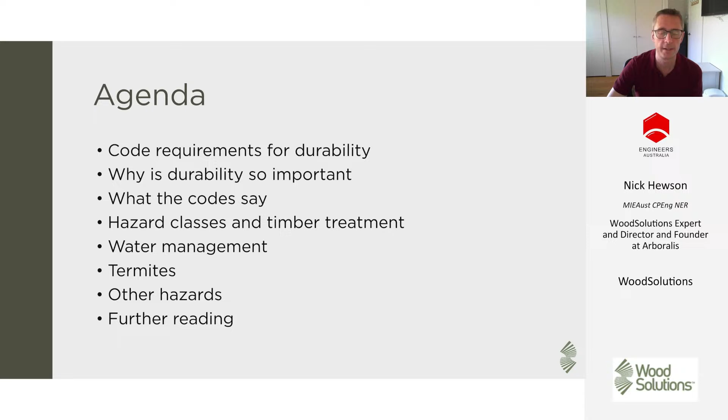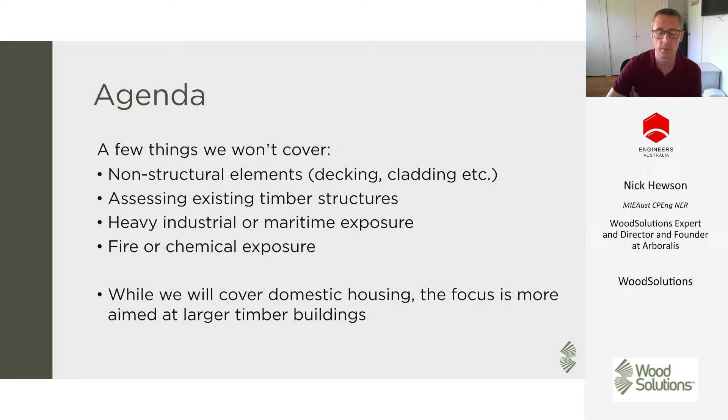As I said, I'm here on behalf of Wood Solutions. So they're a not-for-profit company that's resourced by Forest and Wood Products Australia. Their remit is to promote forest and wood products to the building sector. They offer a whole range of things, from webinars to technical design guides on their website that you can go and download for free, written by industry experts, and we'll be referring to a few of those later on. They also have a project portal, which is a reference of hundreds of buildings from all around the world that you can search for by project type and other variables, which will give you some inspiration.

And why are we here? Why are we talking about timber? Timber is a sustainable, renewable resource. It stores carbon for the life of the building, and has been shown to improve wellness and enhance moods and things like that. So it's a wonderful material, one that I'm incredibly passionate about myself, and I'm really pleased to be able to come talk to you today on the subject of timber.

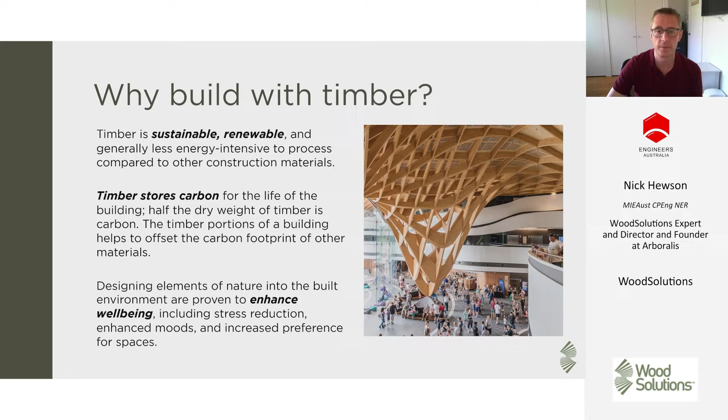So when we look at timber, durability has become a real pet topic of mine over the last few years. Wood can last an incredibly long time, as you see here, with examples of buildings which have stood for over 1,000 years, well looked after and maintained.

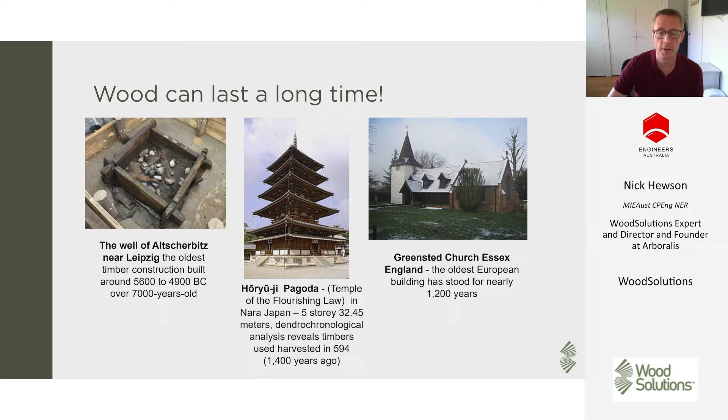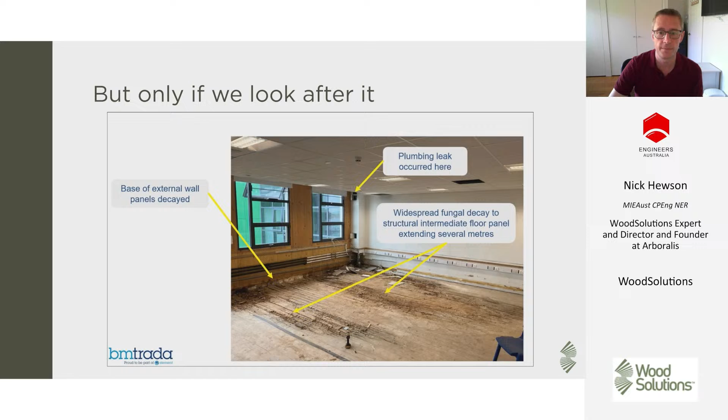But if we don't look after it and maintain it, then wood can deteriorate. What we want to talk about today is some of the mechanisms we can use to help prolong the life of our timber buildings and protect this wonderful material.

So starting at code requirements, when you start to look into the NCC, it's pretty vague on the topic of durability. It doesn't have any specific clauses relating to it, and puts the onus back on individual material standards. So you're looking in the NCC Volume 1, Clause B1D4, which refers to timber construction and refers back to the design standards. There's a lot more information there around termite risk management, and we'll talk more about termites later on.

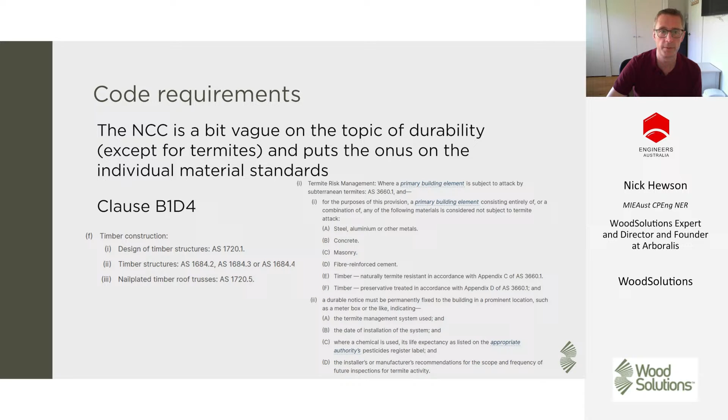But if I dive into AS 1720 Part 1, it has some clauses on durability at the start, but again they're somewhat vague. They focus more around treatment for termites and things, but just highlighting a few key clauses in there, talking about satisfying the strength, stability, and serviceability requirements for the design life of the structure, and we'll talk about design life and things a bit later on.

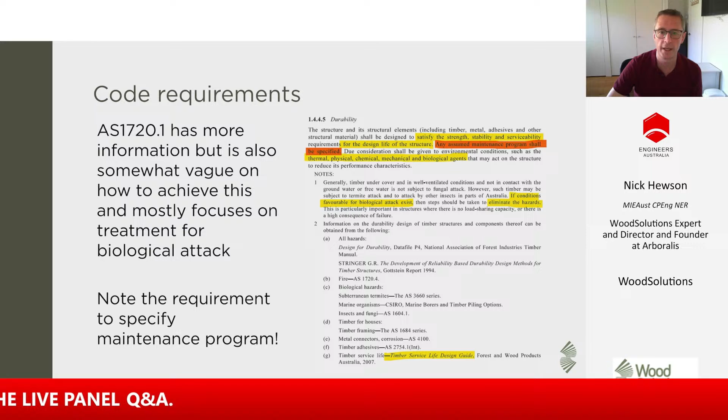And on the one there I've highlighted in red, any assumed maintenance program shall be specified, which is an interesting one, and we'll talk again a bit more about that later. I don't think many engineers will be specifying that in their projects, on their specs, and that's something I think we'll cover during the presentation.

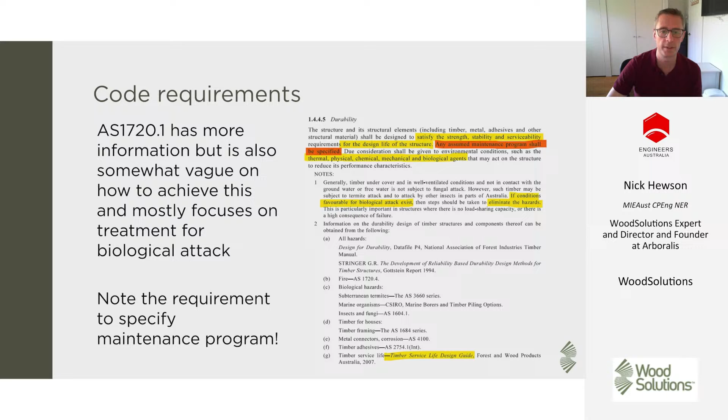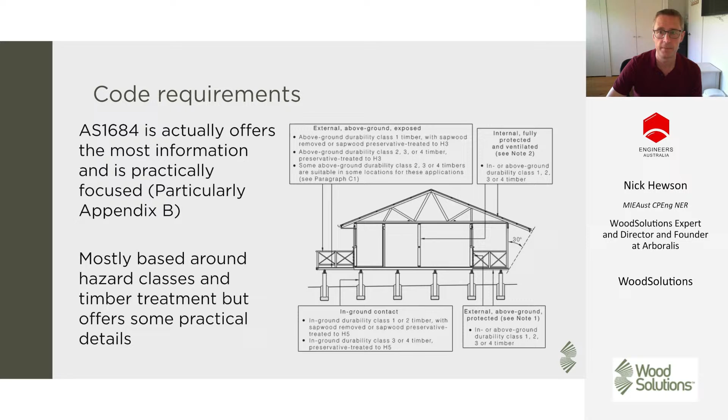So AS 1684 for domestic housing actually offers a lot more information. It's quite practically focused, has an Appendix B, which is all focused around durability, talks around different hazard classes of timber based on the level of exposure to weather or the ground, and gives a lot of classifications for that. It also provides some practical tips and details, and more of those sorts of things are actually contained in some guidance documents.

Technical design guides 5, 13, and 21 from Wood Solutions, again freely available on their website, offer a lot of tips and advice about particularly external timber. There's a lot of good detailing advice and information around timber species and things like that.

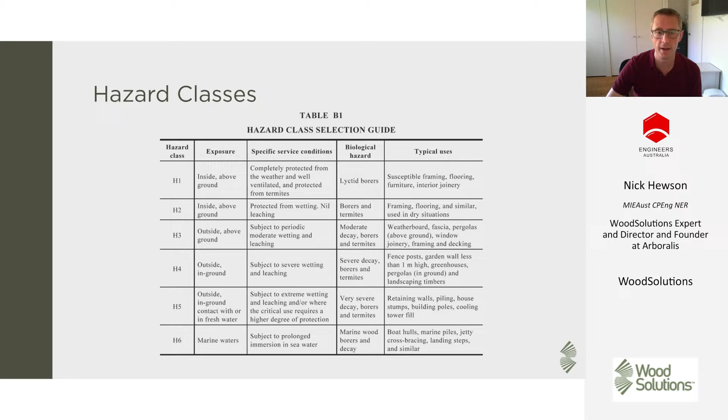So you get hazard classes, H1 to H6, getting progressively more aggressive environments. H1 and H2 are sort of internal protected, H2 being protected against termites and the like, with H3 being outside and above ground, subject to some weathering. These are the sort of main ones we will be focusing on. H4 and above are a lot more specific.

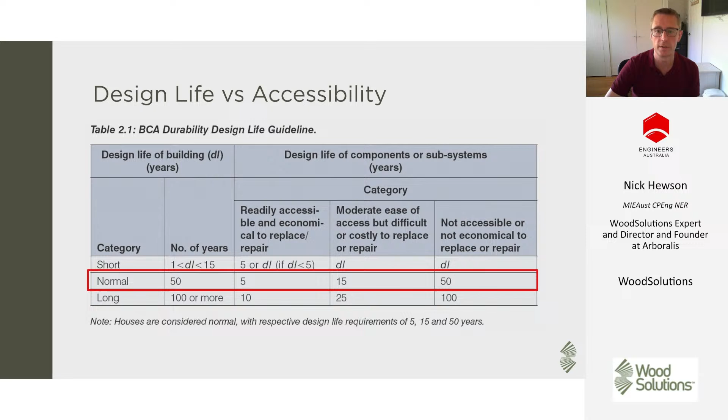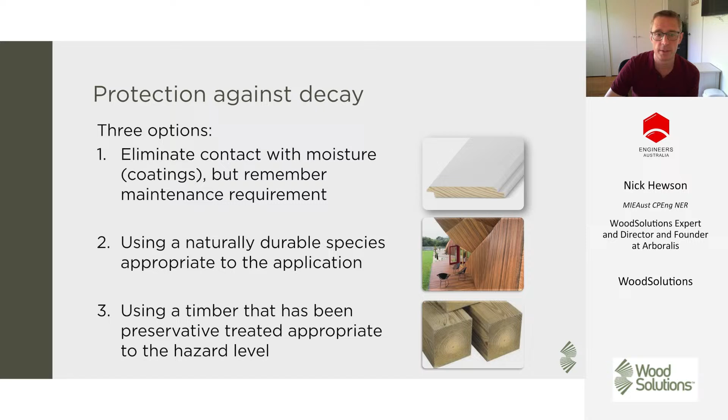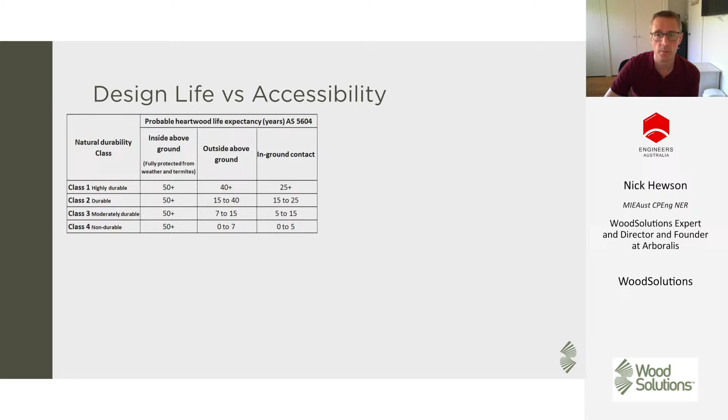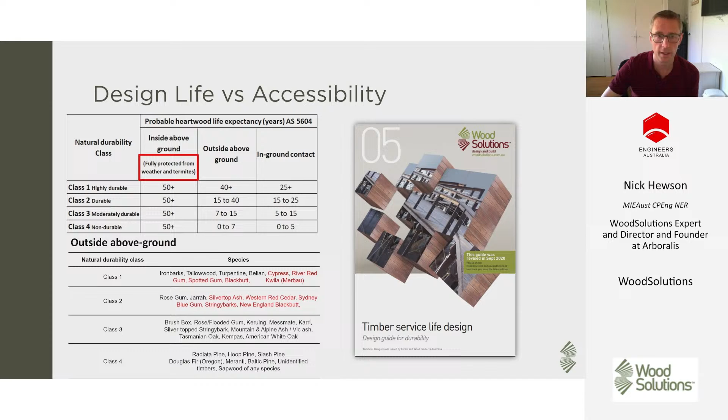So looking at different life expectancy, the Wood Solutions Design Guide will give further information on different species suitable for different classes, but just looking at outside, above ground, what are the different species we can use for those. So if it's outside, above ground, and you want it to be lasting 40 plus years, you're in those sort of class 1 species, which are your ironbarks, your spotted gums, your blackbutt, merbau sort of timbers. So obviously those ones are rarer and more expensive, so we need to have these sort of nuanced conversations with our clients around picking the appropriate timber for the job.

Timber treatment: preservatives can be either water or solvent based. There are a range of different treatments out there offered by different manufacturers. One thing I'll say about treatments is checking the compatibility with finishes and any ESD requirements.

Some of the higher treatments, at the H4, H5, H6 level, are fairly nasty chemicals, so we want to limit those to only where we absolutely have to use them. But a lot of the H1, H2 treatments are odorless, colorless, particularly when you get into the mass timber space.

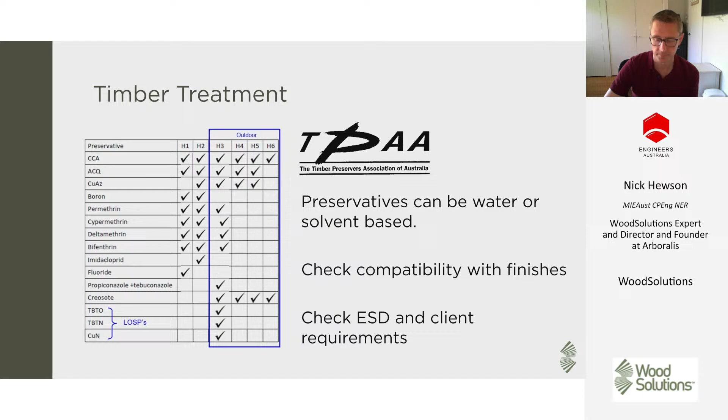But looking beyond the code, looking at durability as a larger picture, the expected design life we mentioned earlier assumes that the timber is fully protected from the weather and termites. So for it to last 50 years, the code says we can use timber as long as it's fully protected. But can we assume this?

I think increasingly we need to question this - whether we are fully protected, what other mechanisms we're putting in place in the building, and can we ensure that timber treatment or choosing a durable species is pretty essential.

If you're looking at external timber, there's not too many shortcuts there, but it doesn't necessarily solve the original issue if you're looking at internal timbers and things. So we could treat every bit of timber in a house, but that's adding cost, it's adding potential unnecessary chemicals into the environment.

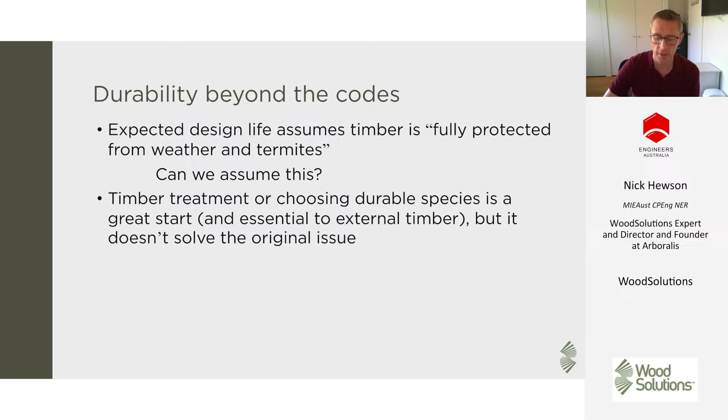So how do we deal with this more appropriately? I think that approach where we default to treated timber for everything is a very elemental approach. And I believe, particularly as timber buildings get more and more complex and the risk level increases, we should be taking a more holistic view of durability.

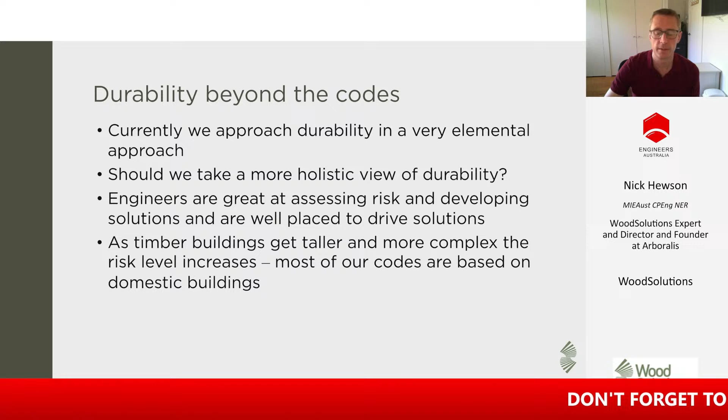As engineers, we're very well placed to assess risk, develop solutions, and we can be the ones to help drive these conversations with clients.

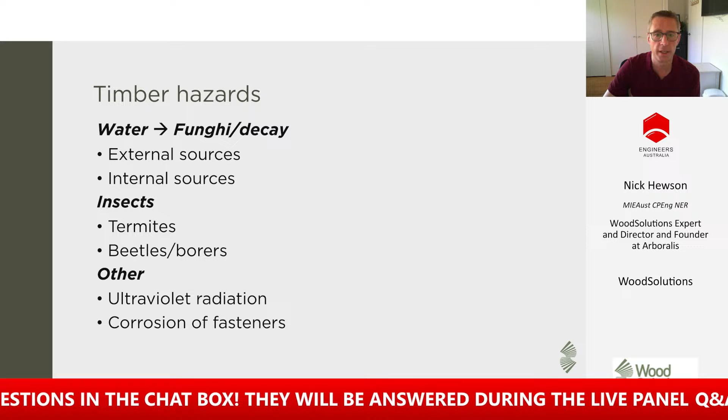So, going back to basics, looking at the timber hazards, the main ones I'm going to focus on today will be water, looking at both internal and external sources, looking at termites and insects, and then a couple of slides at the end on UV and corrosion.

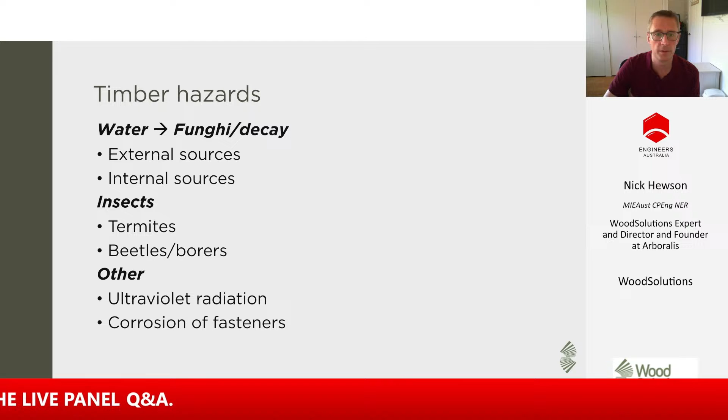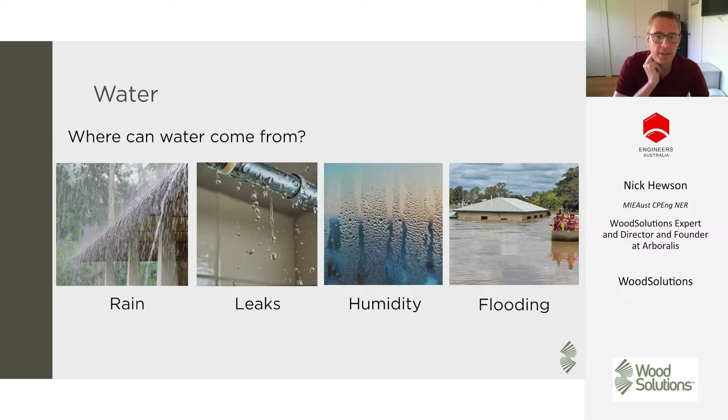So where does water come from in our buildings? Typically rain, typically things like leaks. To some extent, humidity and flooding can be issues as well. I'm just going to work through each of these.

But why is water important? Water itself isn't necessarily the problem, but the presence of water in the timber, in the structure, can lead to other issues.

Mold is probably one of the first ones that you're likely to see on site. Wet timber provides surfaces for mold to grow. It can happen pretty quickly, and it happens on most sites, to be honest. I've seen a lot of mass timber buildings go up, and there'll be some issues with mold somewhere. It's very difficult to avoid.

The mold spores are in the air as soon as you create that wet environment, and the timber provides the food. The mold spores can start to take hold and grow. It's not necessarily a structural concern, but it's something that needs to be treated before the building's closed in, to make sure there are no long-term health issues associated with it.

Where it is found in those long-term cases, it's often found more around humidity, condensation, inadequate insulation, leaks through windows and the like tend to be where you'll find mold once the building's in service.

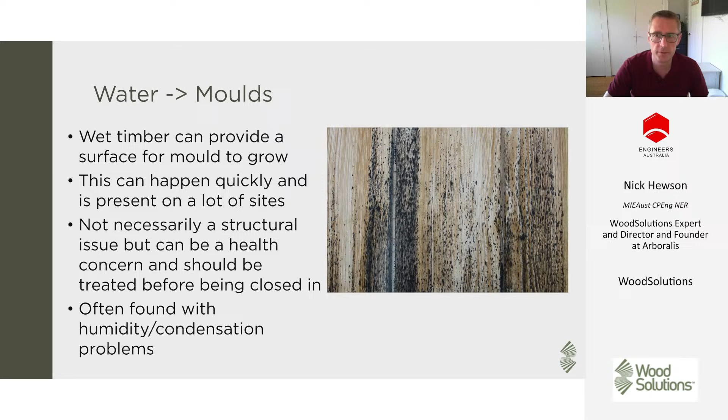More seriously, water can lead to fungal attack - that's decay, rots, white rot, brown rot, all sorts of different exotic fungi - and that can start to occur within a couple of months depending on the timber species, if it's remaining wet.

So for fungi to thrive, you need moisture content greater than 20%, you need oxygen, a nice warmish temperature, and the food. So removal of any of those four will prevent it. However, removing the moisture is probably the one that needs the most focus.

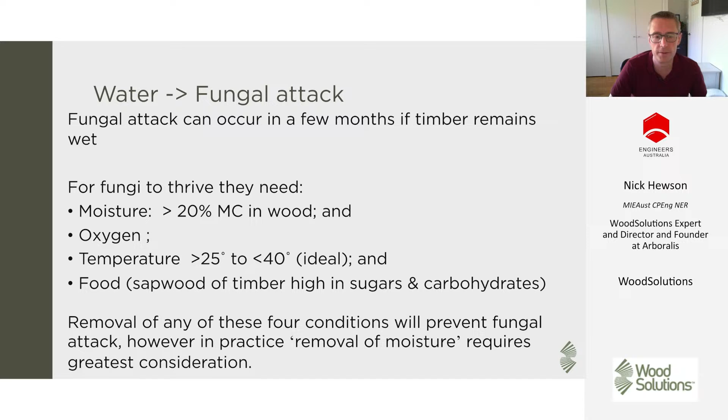Looking back at those moisture sources, water or flooding is probably not one we need to focus on too much. There are some requirements in the ABCB guide for construction of buildings in flood hazard areas, which talks about...

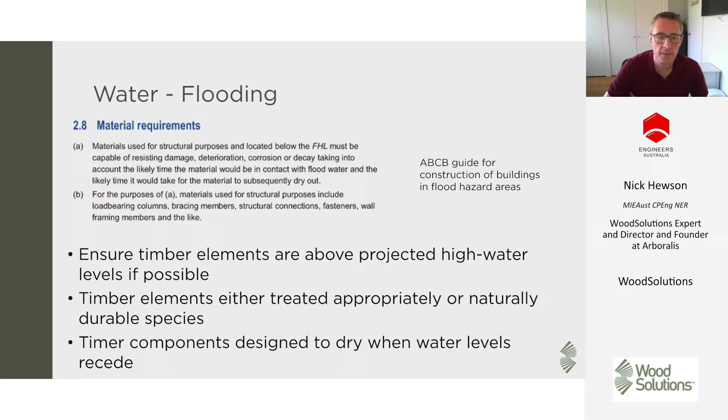ensuring that material in contact is allowed to dry out. My gut feel for water in flood-prone areas is to make sure all timber elements are projected above high water levels, timber species are durable or treated, and components are designed to dry when water levels recede. So there's certainly some areas where we need to bear that in mind, but this is probably more of a niche case.

Humidity is one that is starting to come in. There's a lot more focus on things like condensation in the ABCB these days. The short answer is avoiding impermeable layers like closed cell insulation or anything in the building envelope that will inhibit moisture. The moisture will tend to want to track in and out of the wall depending on the climatic conditions and the internal environments.

Mass timber and CLT in particular is one that needs a real strong focus because it is inherently so airtight. So you need to get that specification of membranes and insulation spot on to avoid the risk of inhibiting moisture movement and trapping moisture in the panel.

High humidity environments like swimming pools are very specialized, and anyone embarking on projects like that should work really closely with timber manufacturers, with coating and preservative treatment suppliers to help inform their design.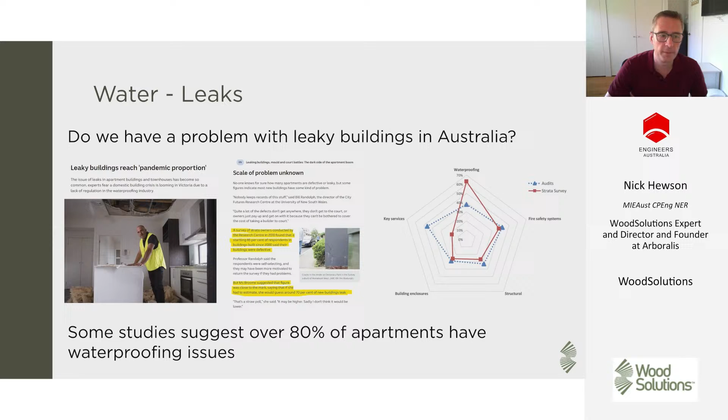So what do we need to do to address that through our designs, particularly as we start to push timber into larger structures, apartment buildings, mass timber, where the consequences and the cost of remediation get so much larger.

Basic principles, the 4Ds we call them, are a great starting point for reducing issues. Deflection - allowing the water to stay clear of any external envelope. Things like overhanging eaves are great for that.

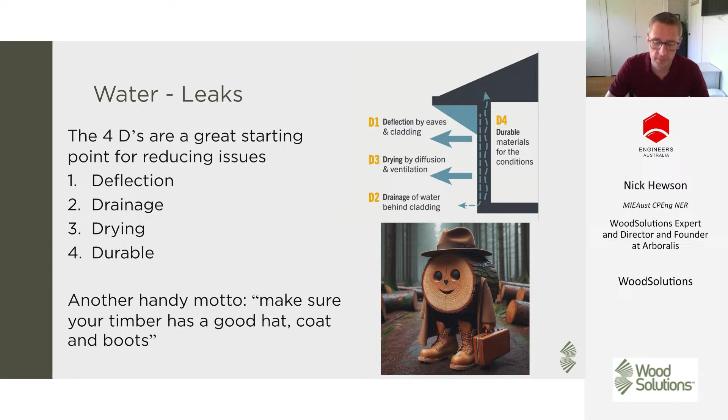Drainage - allowing any water that does get into the structure some ability to drain out, whether that's drained cavities behind cladding or drainage points within your structure. Drying - allowing those areas of timber susceptible to water and moisture to dry out, and choosing durable materials as we discussed earlier.

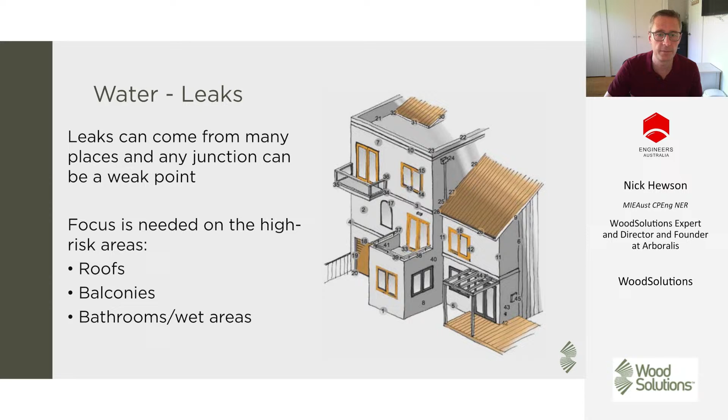So leaks can come from just about anywhere. Any kind of junction can be a weak point. But I just want to focus on a few of them quickly. Roofs - overhanging roofs have been successful for centuries.

I'm super wary of anything related to parapets and box gutters and the like. It just gives the possibility for water to collect somewhere on the roof, drains to get blocked. So there's a lot that needs to go right for those to work well.

One thing I often try to do in timber structures, again looking at things like CLT, is can we set the structure to fall? Is it possible to do that as part of the architecture, because it's providing us a backup. If you're putting in a dead flat CLT roof, that's going to have a deflection associated with it, so it will have low points, and water getting in will tend to sit there. Whereas if you can fall the structure, any water bypassing your roof can potentially drain out to somewhere in the facade and migrate its way out.

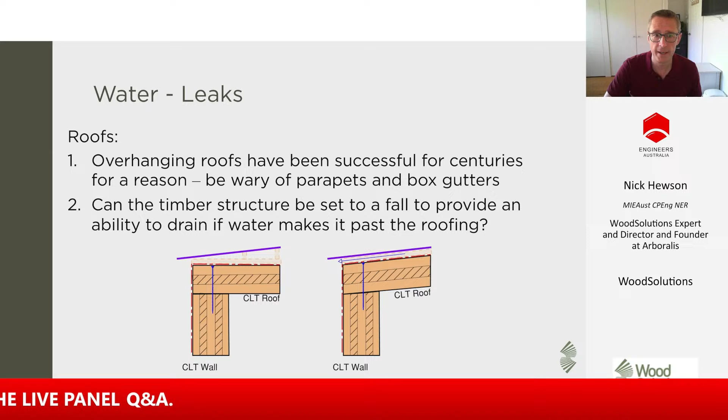What level of redundancy is there in the waterproofing system on the roof? Are we reliant on single membranes? When is that waterproofing system applied?

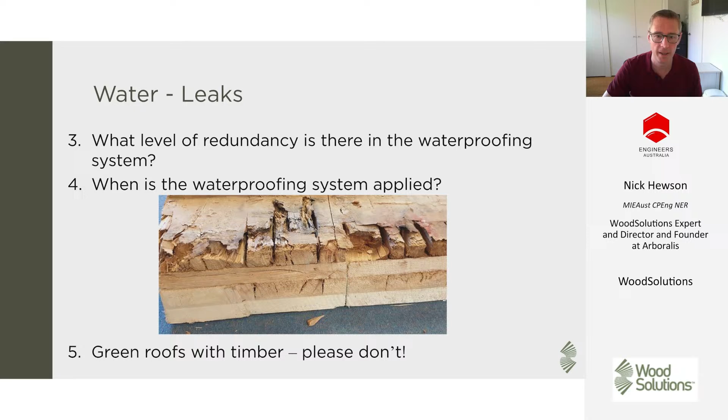Your site controls and making sure we do those things quickly is important. Green roofs with timber - please just don't do it. I think it presents so much risk. We need double, triple layers of protection, and if you want to do something like that, there's just a lot of water associated and a lot of risk.

Balconies - I'd question whether timber balconies are appropriate in the first place. Similar to roofs, can you set these to falls? And what's your backup plan if the membrane fails?

The picture at the bottom is a real project I've been involved in, where there was a CLT balcony with a single membrane on top, but that membrane failed, and water was able to get in, track under the membrane, and between the CLT and the fire-rated plasterboard underneath. The problem was it wasn't a lot of water getting in each time, but it was very difficult for that water to get out, so significant volumes of water were trapped in there for a significant amount of time.

One of the other aspects is how long does it take before that is visible? It can take several years potentially for water to make itself known. So if you are doing mass timber balconies, just be really, really careful - make sure you're going belt and braces with waterproofing.

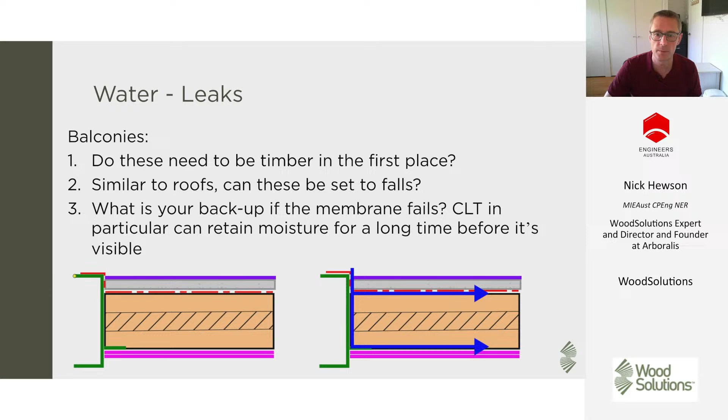How are those inspected or remediated? I've started to see a lot more pod and paver type solutions specified for balconies. I think it's a really good solution for timber - it gives us the capacity to lift up pavers and to inspect and remediate if there are problems.

Going back to that question around design life and remediation - if there's a problem, how easy is it to remove the damaged panel? Looking at that detail at the bottom, that's a sort of detail I used to do on projects where set-downs of balconies tend to overlap, and you screw through to both - it's a nice robust detail. But that balcony panel, if it ever needs replacing, is an absolute nightmare.

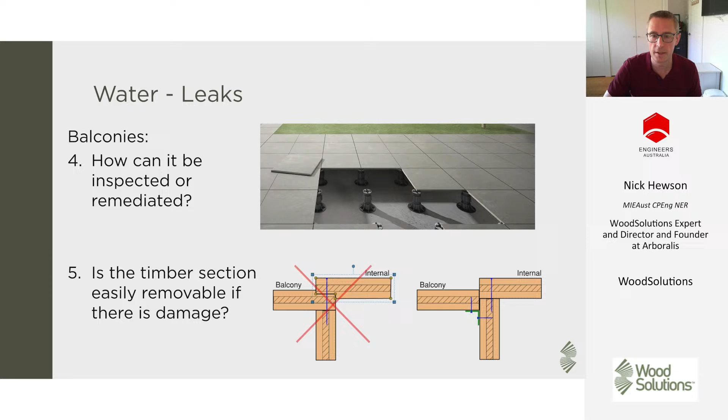So do we look at other systems where we take those higher risk areas, whether it's a balcony, a wet area or something, and give ourselves the possibility to remove those simply?

Wet areas - again, relying on single membranes in these is fraught with problems. What's the design life of that membrane? So if we go back to our initial question about design life and the assumption that the timber is going to be protected - what's the design life of our membrane? Is it 15 years? Is that going to be replaced after 15 years? What is our mechanism there?

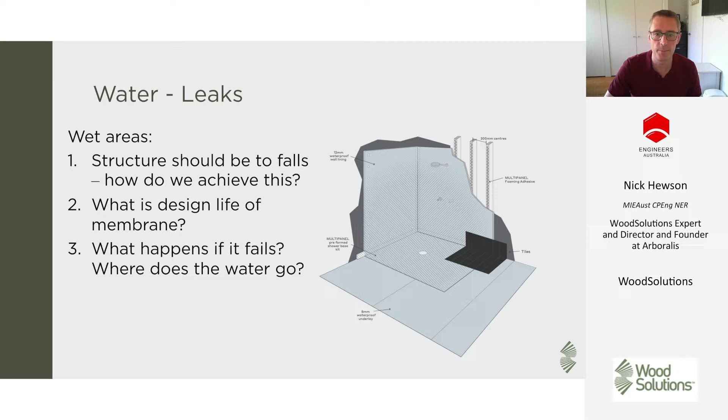I'm always asking myself when I'm designing these things, what happens if it fails? Where does the water go? These are the guiding principles whenever I'm thinking about leaks - putting a minimum of 2 levels of protection in any high risk areas. Now, whether that's a membrane and treatment to the timber, or 2 layers of membrane, or a waterproofing system and active monitoring.

Always got to ask yourself, how do you protect against that? Because I don't think there's any way we can guarantee that those membranes and that protection is going to last the design life of the building. Always got to ask yourself where the water goes if it leaks, and how long before a problem is known about.

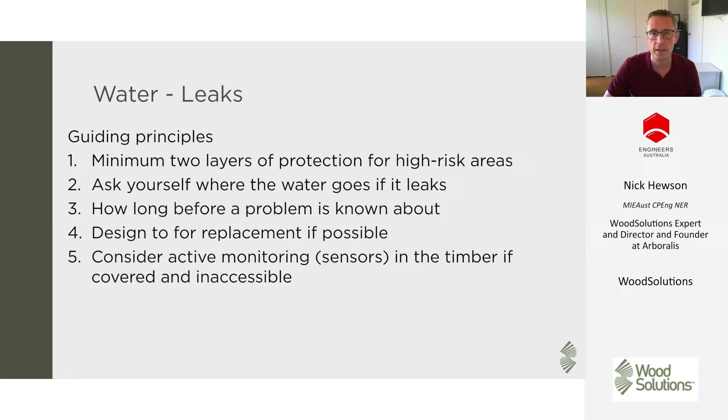Particularly in domestic or apartment buildings, we have large build-ups below the slabs for acoustics and fire. It can take a long time for water to migrate through those. In an office building that potentially has more exposed soffits, you're slightly more likely to get notification that there's a leak much faster. So having that kind of nuanced conversation is really important.

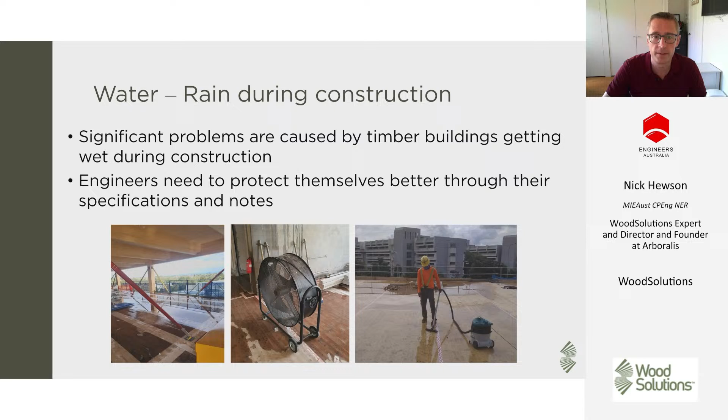Rain during construction - this is something I'm getting called into a lot at the moment. Significant problems can be caused by timber buildings getting wet. And I'm seeing a lot of notes from engineers that are just kind of impossible to comply with.

I've seen this note on a number of drawings which says the builder is to maintain all timber below 14% equilibrium moisture content, and I think, how do you expect to do that? Even building undercover at certain times of the year, the EMC of the timber is likely to be above 14%. So we need a more nuanced approach to moisture measurement - where are those measurements taken?

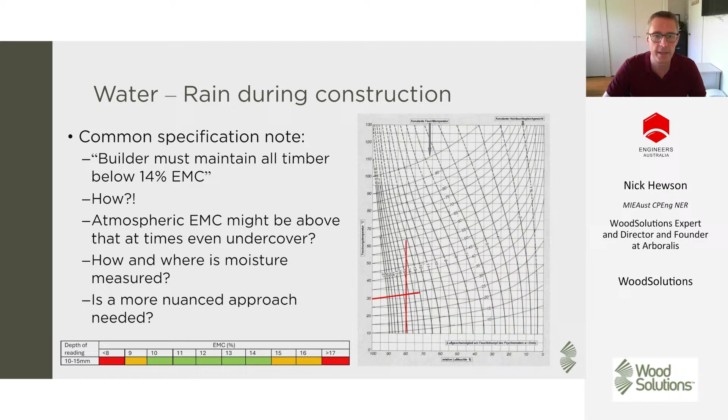How are moisture readings taken? Often they're taken with moisture meters that aren't calibrated and things like that. So we need a more nuanced system, and I'm advocating for more of a traffic light system, which looks at moisture content, time, and depth of reading as a matrix approach to say where do we need to take action, where do we need to think about remediation, and where we don't have to panic.

Focus on the junctions when we're looking at rain. They're going to be the weakest points. There's a great guide by RDH, which I'll probably reference a few times in this talk, but it's well worth looking at, particularly for mass timber buildings.

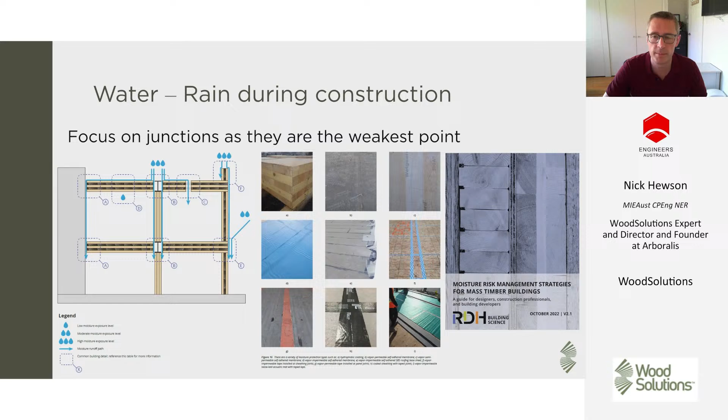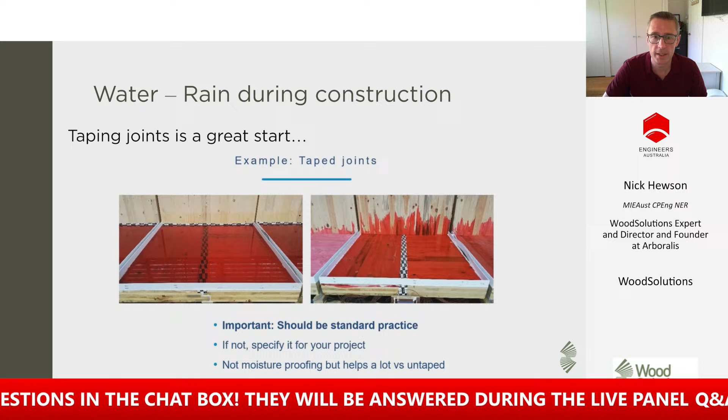Taping joints should be absolute basic for mass timber. There's a picture here of two examples showing what happens if you don't tape them. You get a lot of moisture drawing up walls through capillary action into the base of your walls. It's not the be all and end all, but it does provide a lot of help.

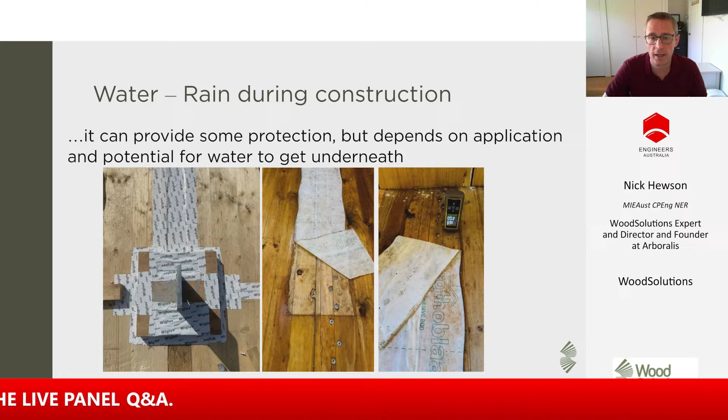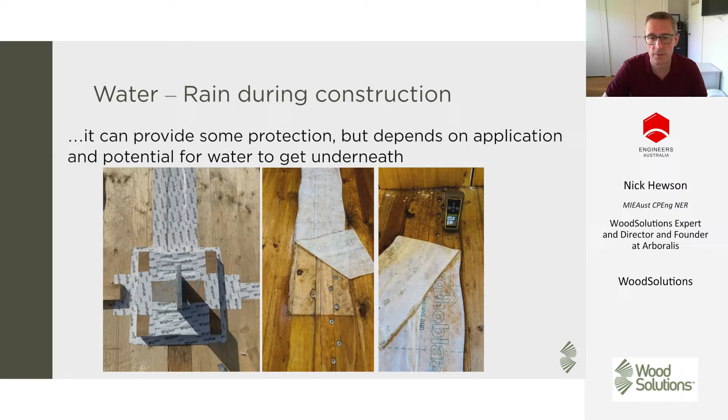It can depend on the application, and putting tapes on only works as long as you keep the moisture out. Once moisture gets in under there, the tape actually prevents the timber from drying out. So you need to be very careful on site about how those are applied, whether there's capacity for water to track in through joints in the timber and the like.

Increasingly seeing more and more slabs protected with membranes, and always remember any visual aspects - water staining, molds - that sort of remediation of those timber elements is very, very expensive.

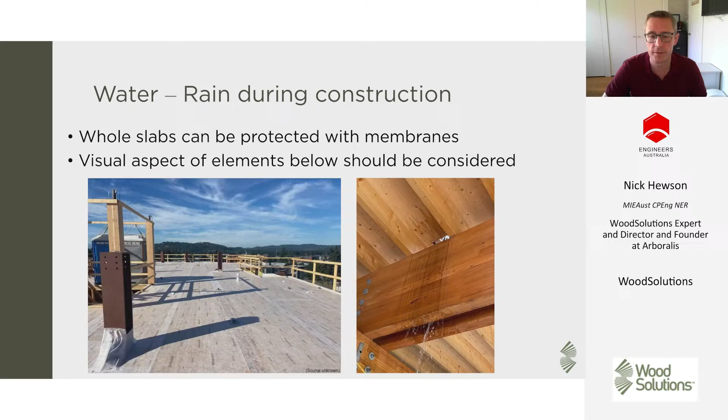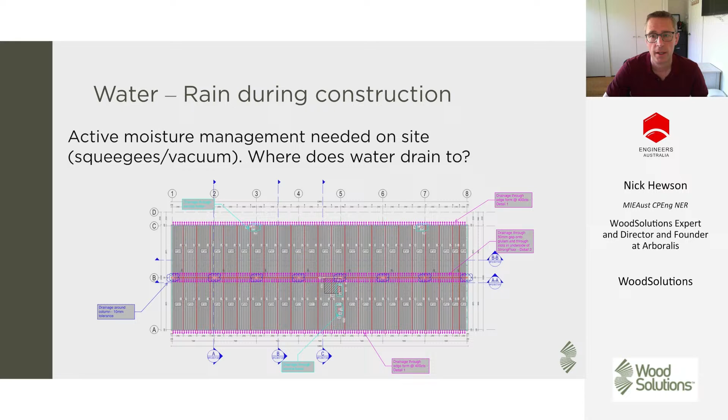Advocate during construction to have a moisture management plan, trying to work out where the water drains to. When the contractor is actively sweeping water off the floor after rain events, where does that get swept to? Where does the water want to track to? We see a lot of issues with water draining down to the face of columns through tolerance gaps and causing significant checking. It's not just visual damage or a long-term opportunity for rot, but tolerances can be significantly impacted too.

This is a real project - I won't say where - but there was an LVL floor system that was designed as a series of 1200 millimeter wide plates. It got very, very wet over a weekend, and it was shocking how much the thing grew. The whole floor plate grew and pushed walls out of plumb. So it's about understanding those tolerances and how water impacts that, and making sure we're designing those into our buildings so we don't have any issues.

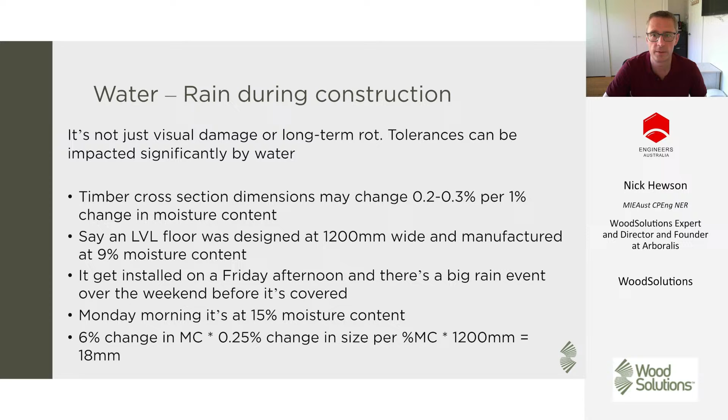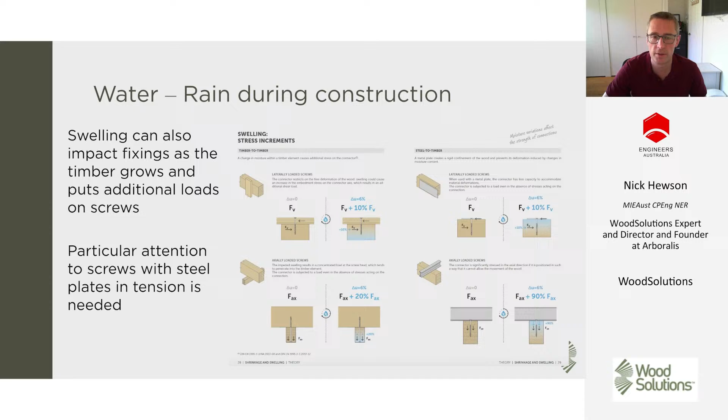When we apply finishes is also super critical - we've got to allow the timber to dry out. A timber frame typically would be about 18% or less before you start applying finishes, but mass timber should ideally be even lower, because it's much more solid, there's much more water in there, and there's less ability for the water to diffuse. We should be specifying that any mass timber elements are at low moisture content before we start to put impermeable finishes and things on them.

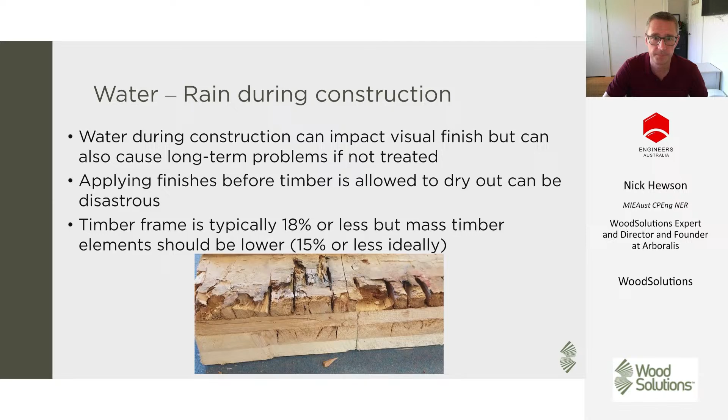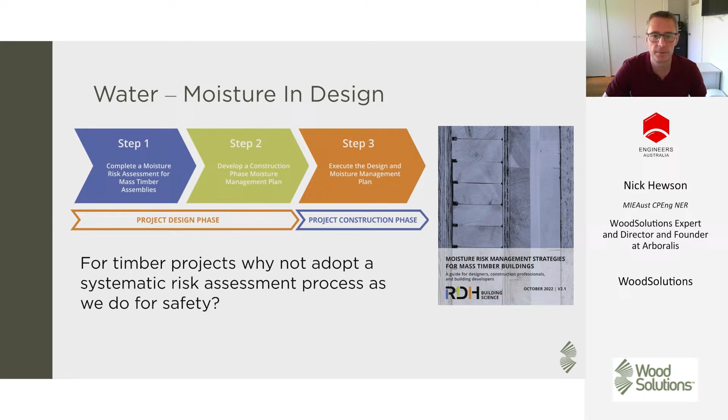Again, that RDH guide - please read that, it's awesome. But we're starting to implement what we call moisture in design. This is my pet subject for the moment, where the same way we'd take a safety in design process, we adopt a systematic approach for risk assessment for moisture management.

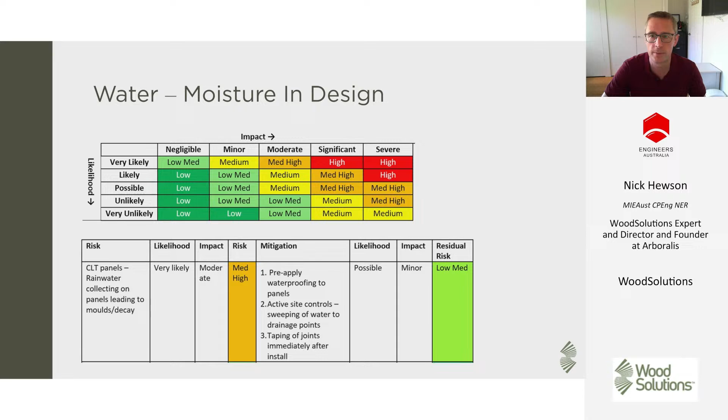These sorts of risk matrices are pretty familiar to most people - going through the project element by element, both in the permanent and temporary case, looking at what the risks are and what the mitigation measures are, and working through that as a design team, I think is going to be super important. There's some great flow charts looking at different ways of building roofs and floors, particularly as you get more complex, larger scale mass timber structures. This is an approach that we need to try to run with our design teams and builders.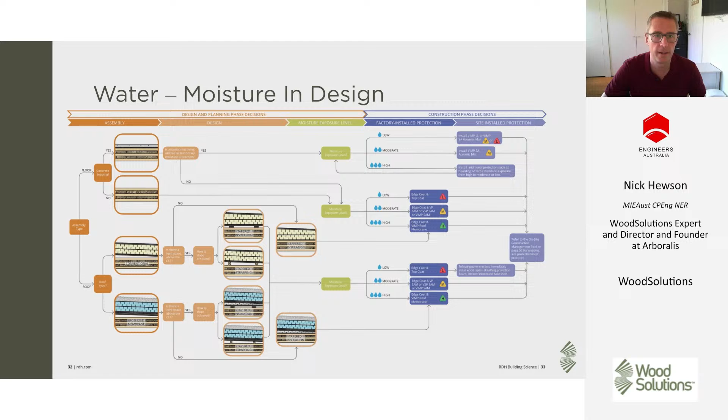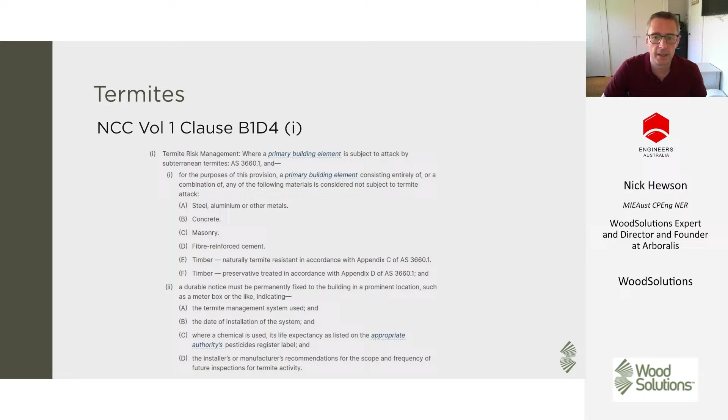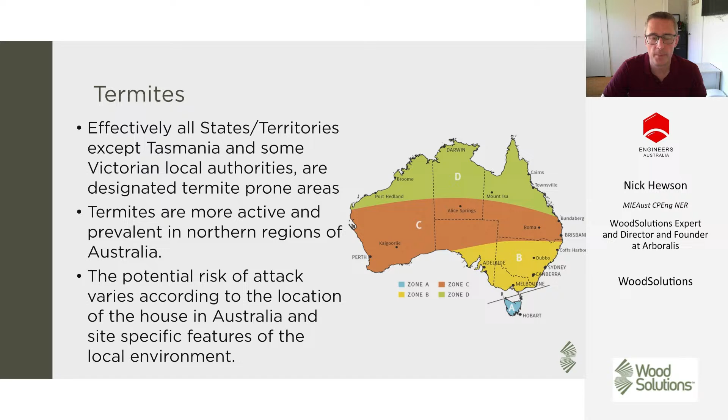Touching on termites now, the NCC's got a fair amount of information on this, refers back to AS 3660, which is the termite protection code. Effectively all states and territories except Tasmania have designated termite-prone zones. They're particularly more active the further north you go. But the risk of attack varies according to the location of the house, and there's site-specific elements to all this.

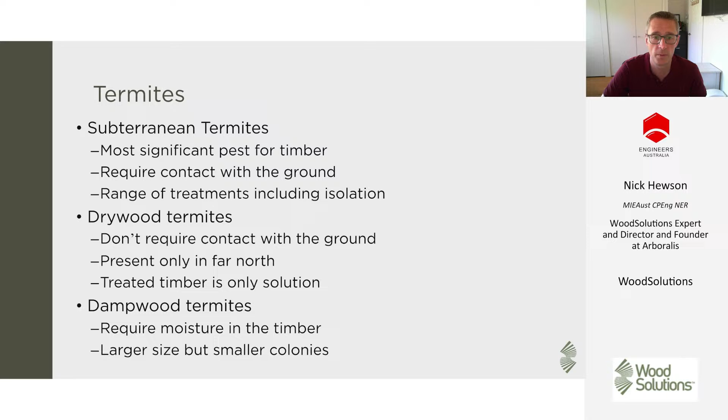There are different types of termites. Subterranean ones are the most significant and most common. They're the ones that require contact with the ground, and there's a range of treatments there, including isolation. Some of the other ones, drywood termites, don't necessarily need contact with the ground. They're present more in the far north, and treated timber is really the solution there.

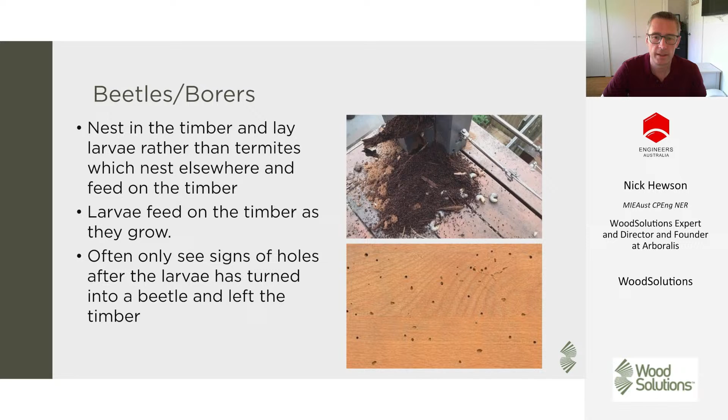Beetles and borers, probably less common, but still an issue. They lay larvae in the timber and they eat the timber as they grow, and you'll only see signs rarely after the larvae has left them, leaving little pockmarked holes in the timber surface.

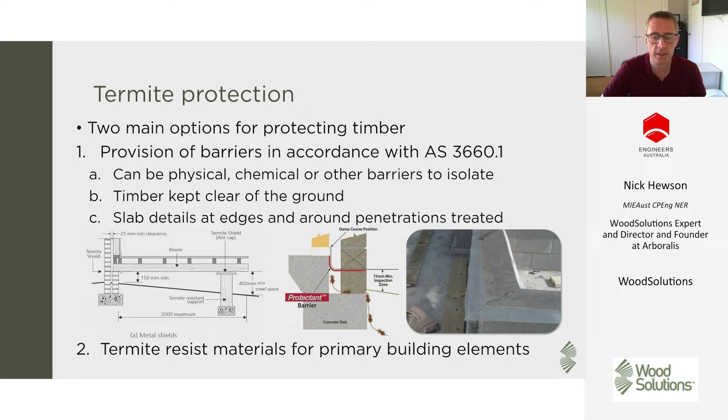Two main options really for protecting timber: either the provision of barriers in accordance with AS 3660 - these can be physical, chemical, or other barriers. Timber should be kept clear of the ground, and slab details at edges around penetrations need to be treated either chemically or with mesh or things like that. Or you're choosing termite-resistant materials for the primary building elements, either termite treatment or termite-resistant timbers.

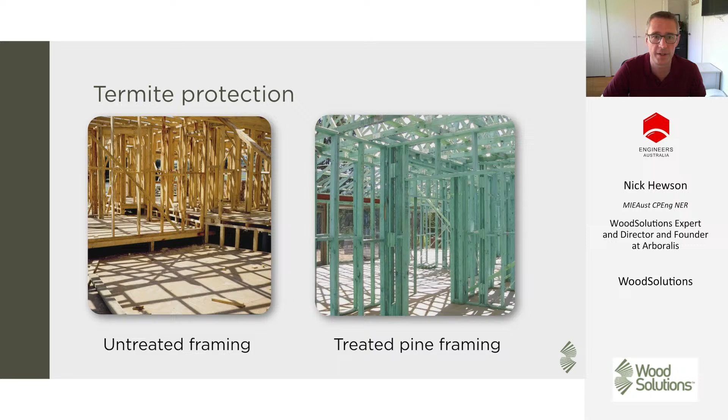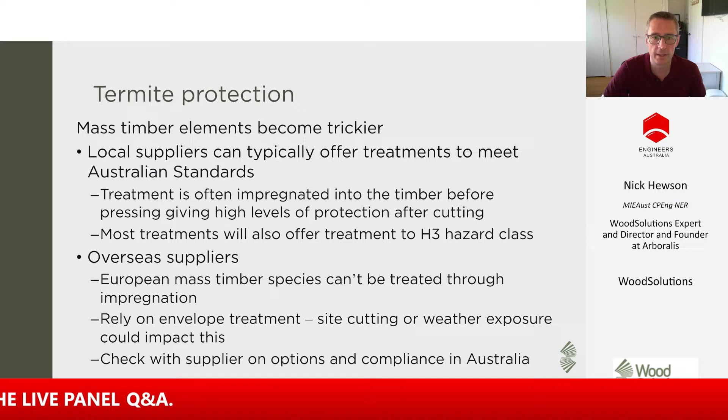When we get into mass timber, it becomes a little trickier. The local suppliers can offer treatment typically up to H3 to meet Australian standards. That's often impregnated into the timber before pressing and gives high levels of protection after cutting. Overseas suppliers, most mass timber species, spruces and the like, can't be treated through impregnation because they've got a much denser cellular structure, so they tend to rely on envelope treatment. So site cutting, weather exposure, things like that can be an issue.

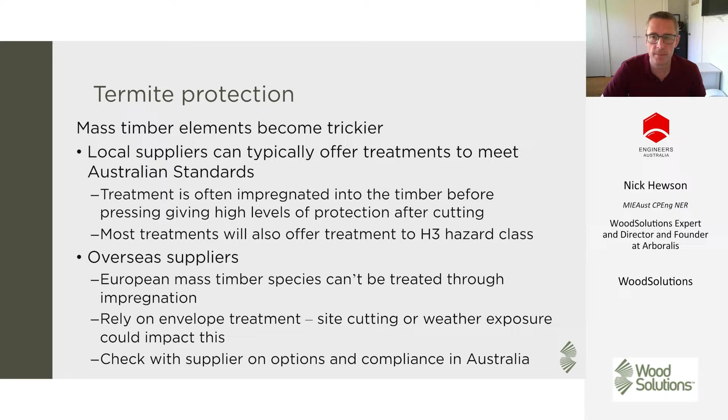So if you want to look at overseas supply and termite protection, then you need to check with the supplier what options are available and compliance with Australian standards. It's an area that's still kind of evolving, and it's relatively new that suppliers are offering these sorts of treatments into Australia.

Some of the other hazards: ultraviolet sun exposure, typically not a structural issue, but it does cause visual aspects. It can cause checking in some extreme cases, particularly if the timber is allowed to get very wet and then gets very dry. I see cracking and checking in columns, particularly where they're up against facades and subject to a lot of sun. In the permanent condition, they can dry out to a very low moisture content and tend to lead to checking. In most cases, it's not a structural issue, it's a visual one.

But in some extreme cases, where timber has been allowed to get really wet on site, it can prove to be a more structural issue that may need some remediation.

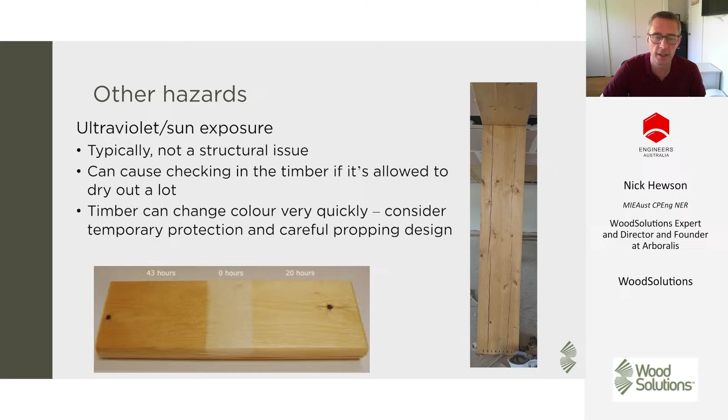Timber can change colour super quickly. Particularly pine has a real bad habit of that, but spruces and all sorts as well. So when you're looking at visual panels, visual elements, make sure we protect those as soon as they're in on site - things like propping, making sure we're protecting those areas. Otherwise, you end up with a white patch where your prop head was and a kind of bleached panel over the rest of it. That's not a structural issue, but can lead to a lot of cost in remediation and recoating or sanding.

Connectors, screw specifications - things can be super important, particularly if you're using something like treated timber. There's different coatings available from different screw manufacturers that are suitable. Galvanized coatings don't really cut the mustard, particularly if you're near the coast or using some of the more aggressive treated timber. Make sure brackets and plates are considered - what level of galvanizing they have, how they're protected from water.

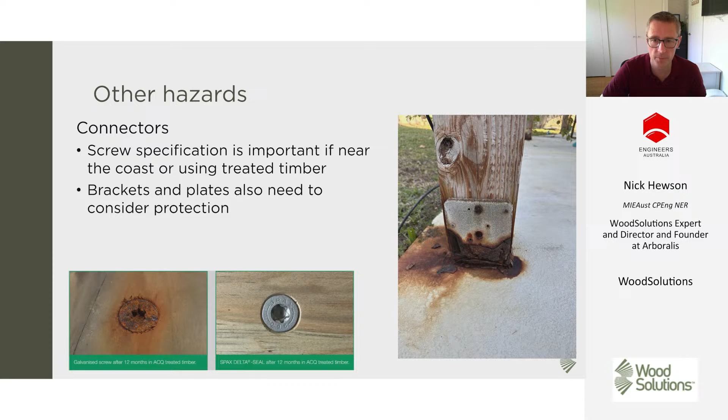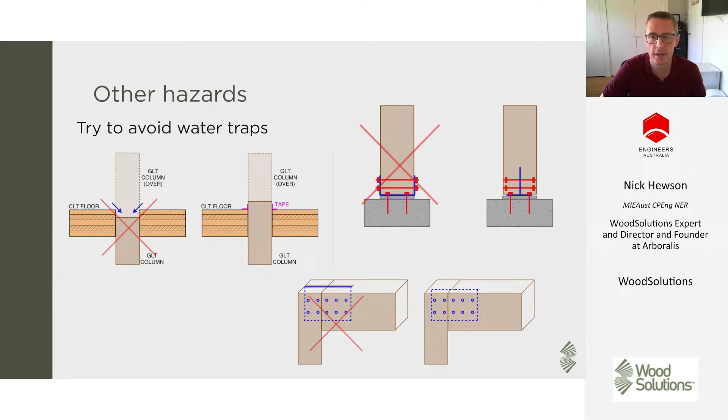Designing to try and avoid moisture traps - there's a few details I've come across on some recent projects, just considering where does the moisture go on site, making sure there aren't pockets where it will sit and not be able to dry out readily.

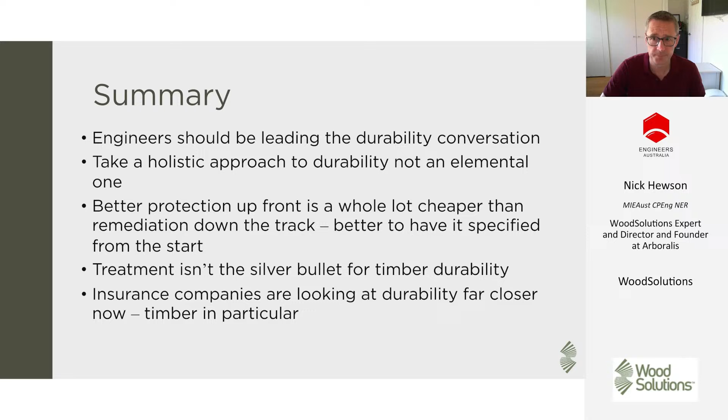Lots of great resources available. I already talked through Wood Solutions. Timber Queensland has a lot of really great stuff, particularly on the domestic housing side. The RDH Moisture Management Guide is awesome. BM TRADA in the UK has lots of really useful papers on timber and moisture management, which are freely available. And then speak to the timber suppliers, secondary product suppliers, with their membranes, coatings, and fixings.